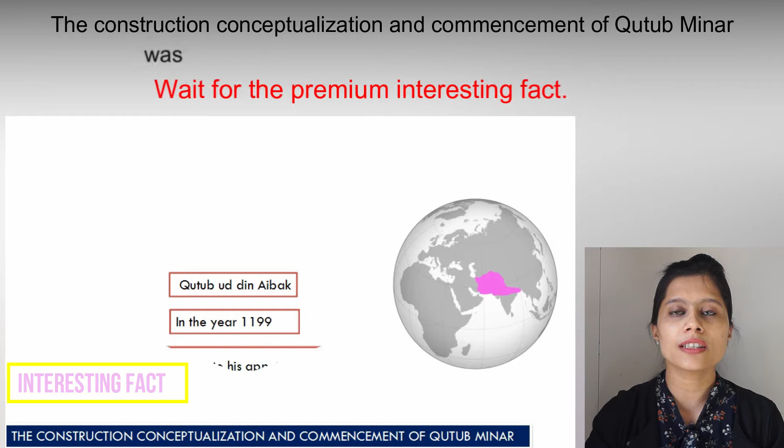The construction, conceptualization and commencement of Qutub Minar was started by Qutbuddin Aibak in the year 1199, perhaps to celebrate his appointment as the governor.

Qutbuddin Aibak was the founder of the slave dynasty and was a general responsible for northern India in the Ghurid dynasty under Muhammad Ghuri, and he was one of the first who brought the idea of the Islamic minaret to India.

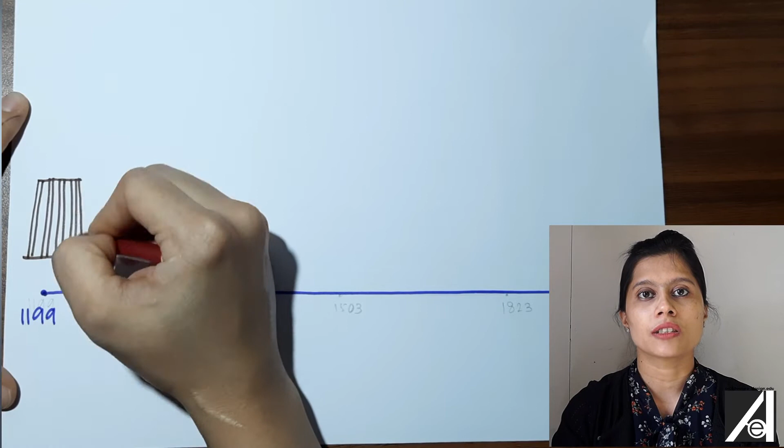Qutub Minar was not constructed under the patronage of one ruler but many. It was commissioned and started by Qutbuddin Aibak in 1199, but during his lifetime only one story was completed. Then Iltutmish added 3 more stories to the Qutub Minar and topped it with a cupola.

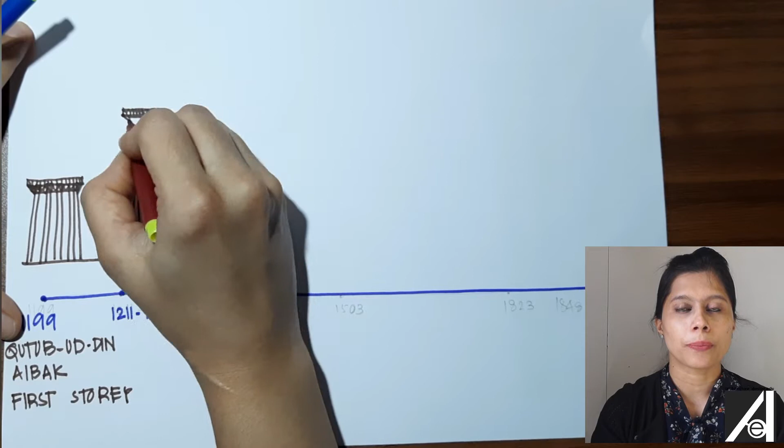After that, there were damages due to lightning which struck in the year 1303. At that time, the uppermost story and the cupola were severely damaged.

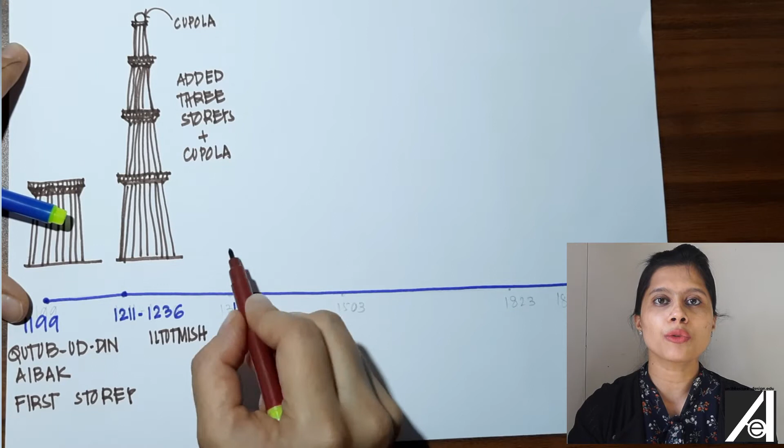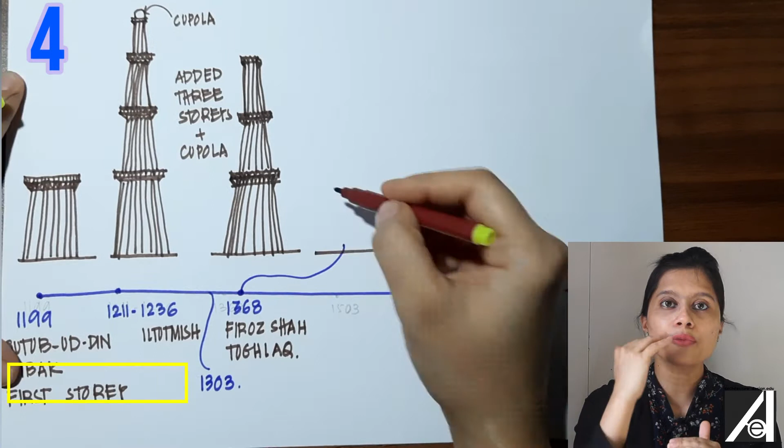In 1368, Firoz Shah Tughlaq added the current stories you can see. The 4th and 5th floors were added by Firoz Shah Tughlaq during the post-lightning strike repairs.

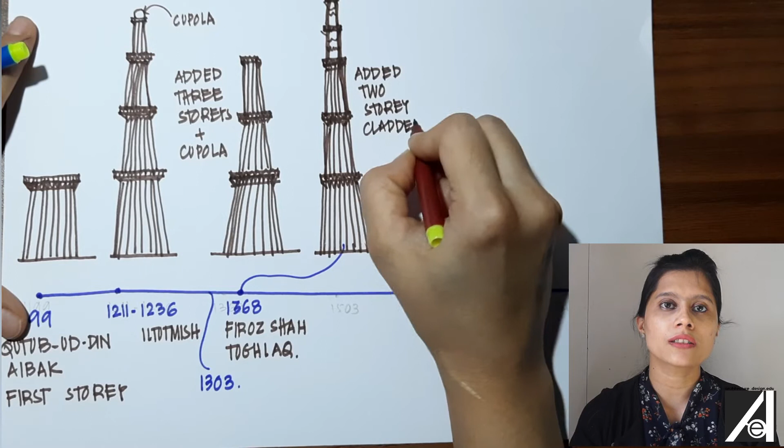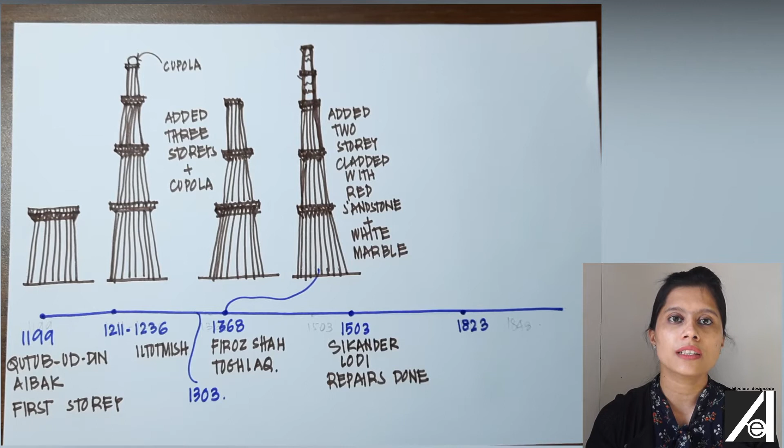After that, Sikander Lodi also did some repairs to the minar. In 1823, during the British colonial period, the cupola was replaced with a Bengal style chhatri on it.

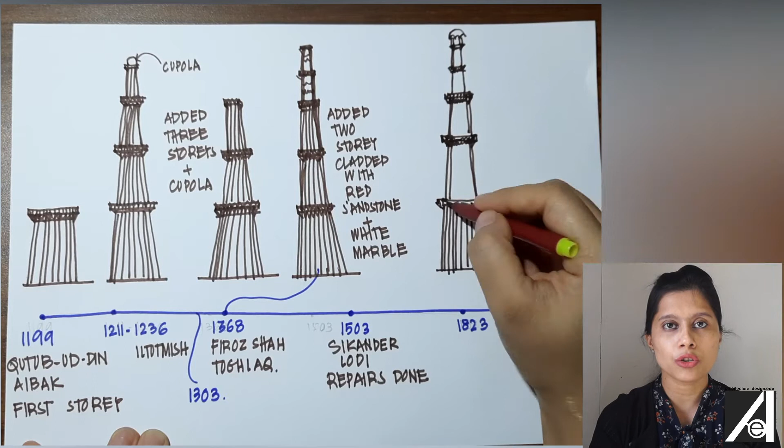After some years, the Britishers did not feel that it suited the minar, so they took off the chhatri, and now we don't find a chhatri on the Qutub Minar. It is just the 5 stories and the balconies.

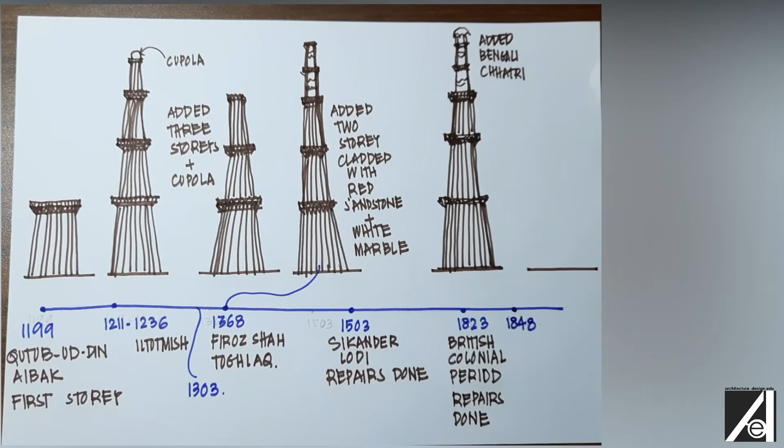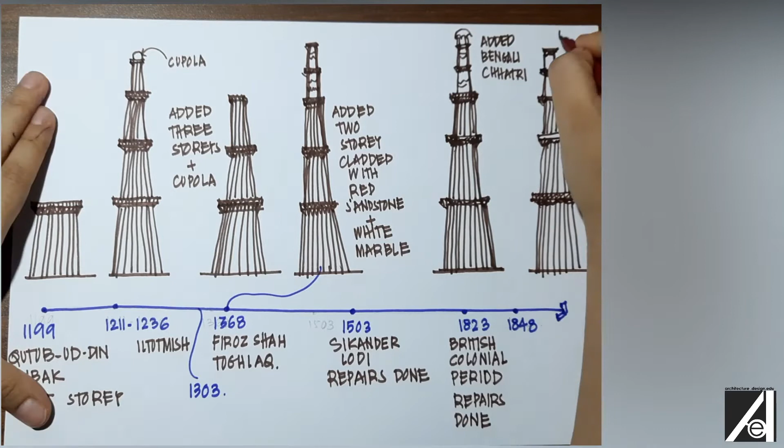Then what might be the inspiration of the minaret? It is said the Minaret of Jam in Afghanistan, which belongs to the Ghurid dynasty, was the inspiration — Qutbuddin Aibak also came from that place, so he brought the architectural inspiration from there to India. The Minaret of Jam is considered the main inspiration, built around 1190, a little before the construction of Qutub Minar started.

Similarities include that both are tapering towers. They both consist of cladding with Islamic calligraphy on it. The Minaret of Jam is made out of brick, while the Qutub Minar is made with rubble masonry. The Minaret of Jam is 65 meters in height, while Qutub Minar is 72.5 meters in height.

The next inspiration is said to be a minaret at Sistan, again in Afghanistan. It has a plan form just similar to the plan form of the stories of the Qutub Minar.

The objectives of construction of Qutub Minar were religious and secular. Religious because it acted as an adjunct to the Qutb Mosque located beside it, and secular because it acted as a victory tower to commemorate victory.

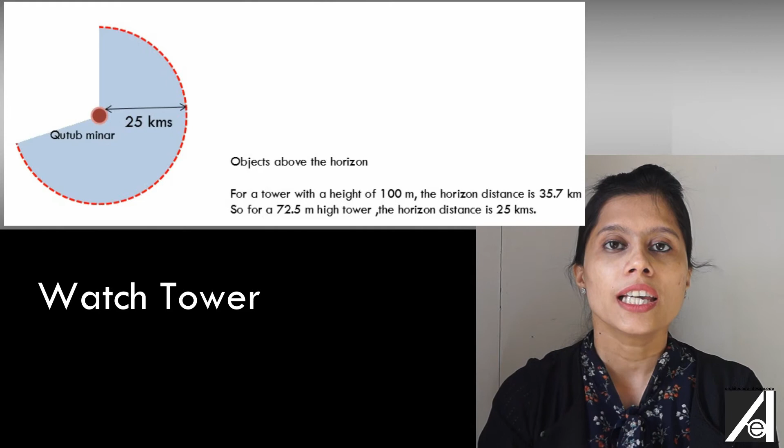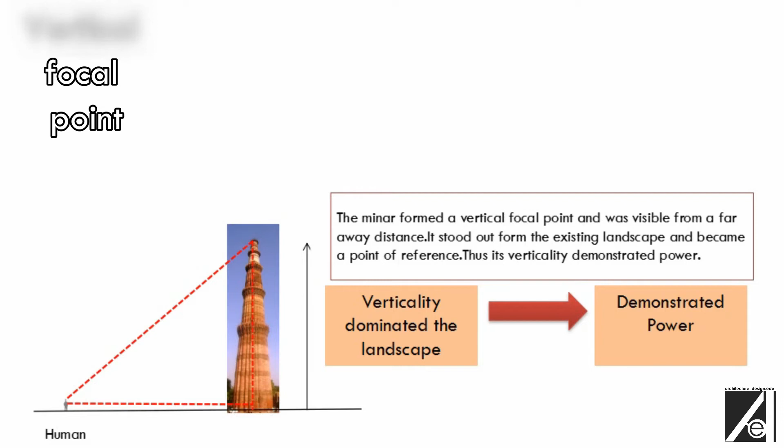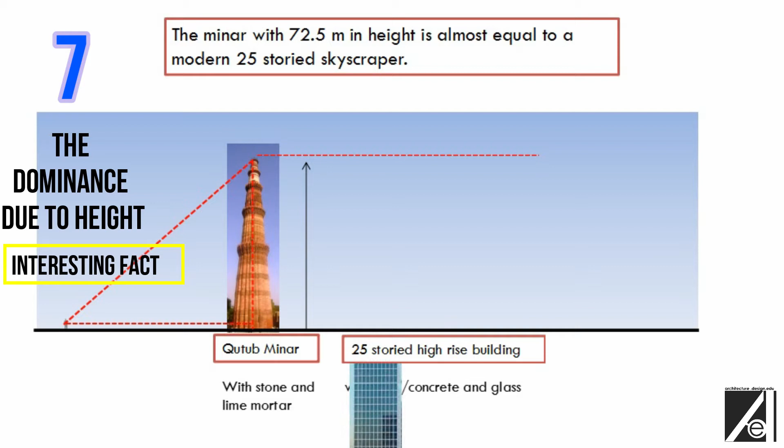For security also, it formed a watchtower, and this reason is valid because one can see almost 25 kilometers far away in all directions through the balconies of the Qutub Minar. The Minar formed a vertical focal point visible from far away, almost 4.5 to 5 kilometers distance. One could see the Qutub Minar stand out from the existing landscape and become a point of reference. Thus verticality demonstrated power. The height of Qutub Minar is 72.5 meters, which is equal to a 25-storied skyscraper.

What gives the strength and stability to the Minar? The Minar has a broad base and a narrow apex. The base diameter is 14.2 and the apex diameter is 3.1. As it was a Minar, it called for a large intensity of load onto the foundations, but the Minar is standing on well-conditioned soil strata with good soil bearing.

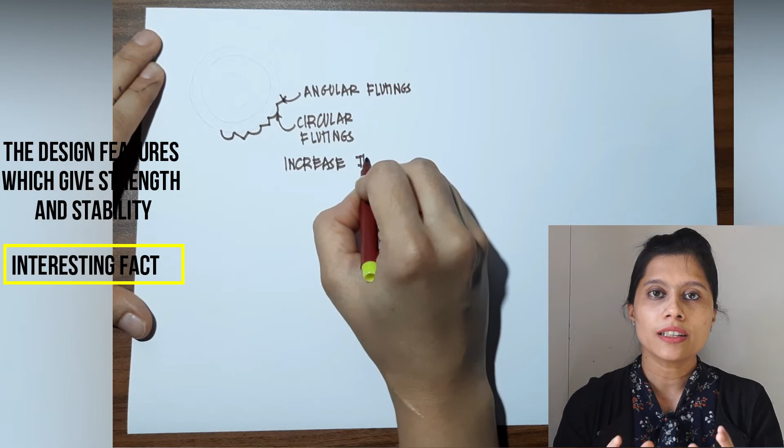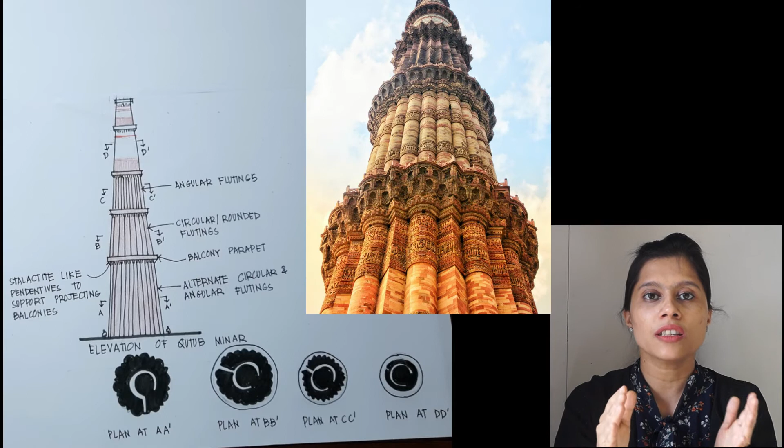To make it very stable at the base, one can find that the Minar is not only having a circular profile, but it also has flutings into the profile. The three bottommost stories of the Minar have flutings which add to the strength. The lowermost story, the first story, consists of alternate angular and circular flutings. The second story consists only of rounded flutings. The third story consists of angular flutings, and the upper fourth and fifth story don't have flutings and have a circular plan.

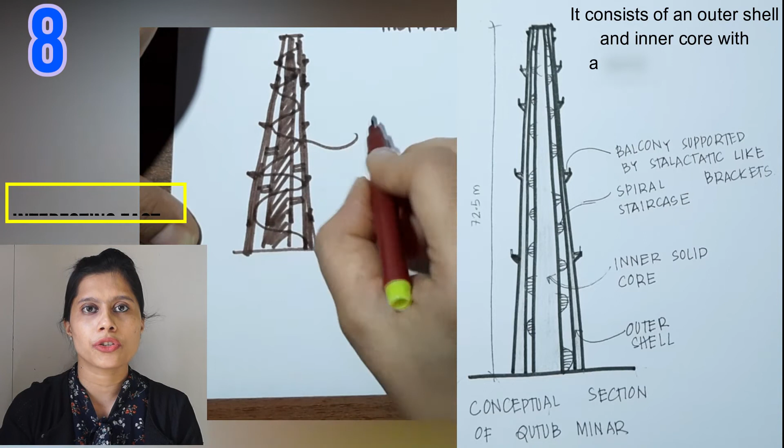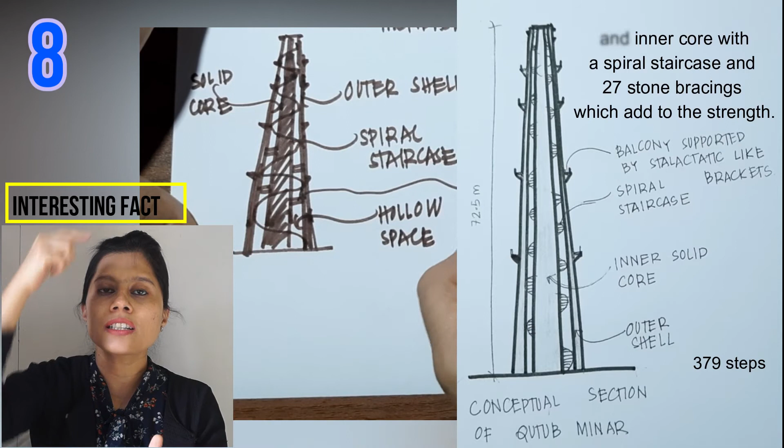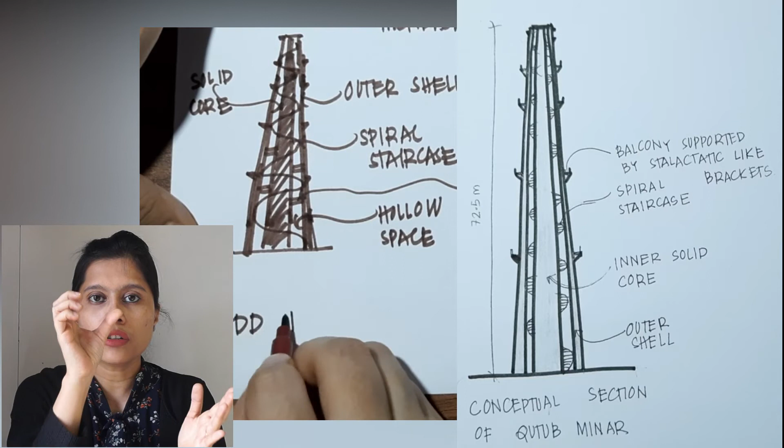Let's see the structure of the Qutub Minar through the section. In the section we can see there is an outer shell, and then an inner core which is very solid. In between the outer shell and the inner core there is a spiral staircase going through, and this spiral staircase has 379 steps. This spiral staircase adds to the strength of the Minar. It connects the hollow shell and the solid core, and it has 27 stone bracings which add to its strength.

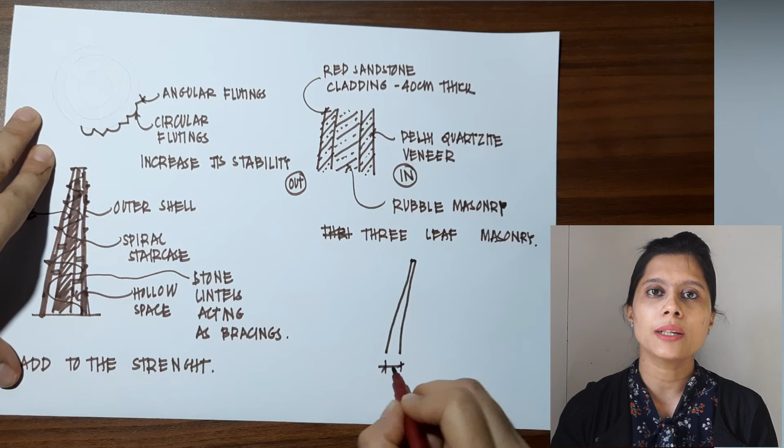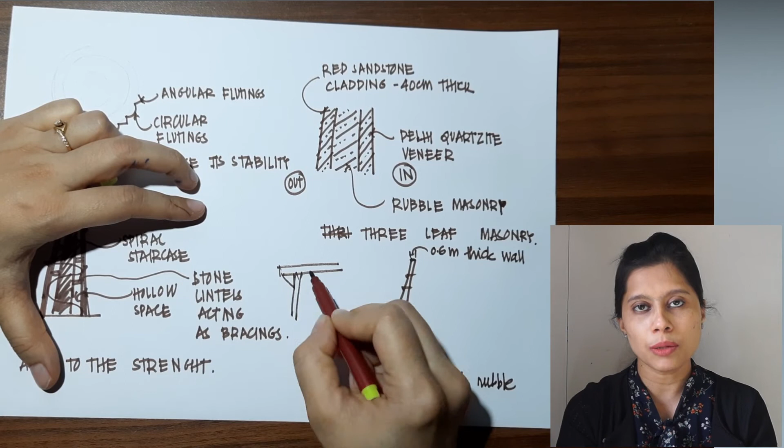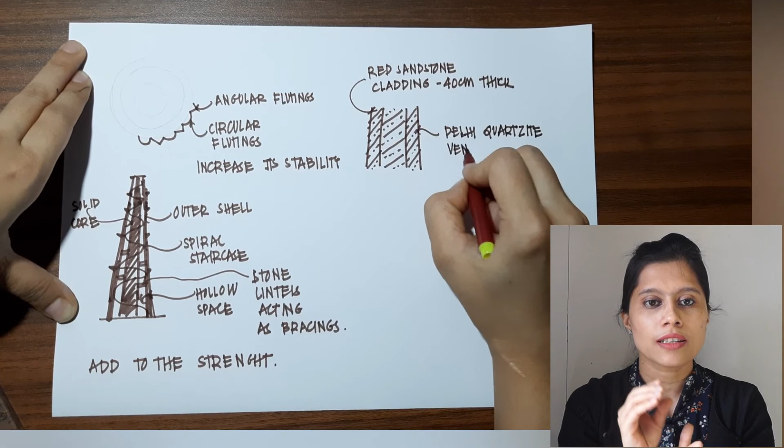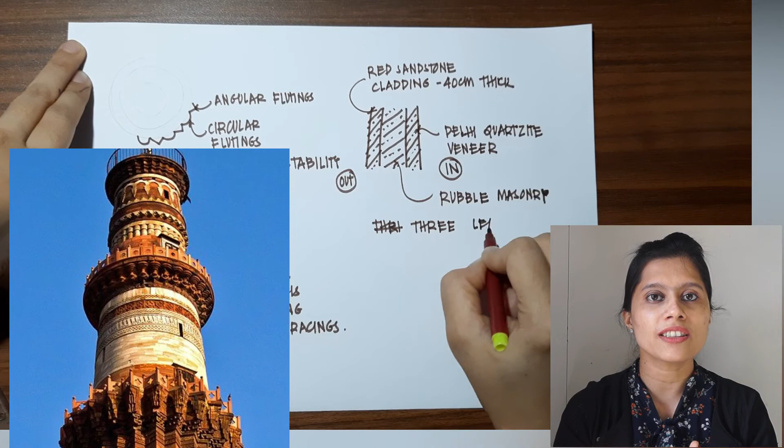What are the building materials and construction techniques? The Minar has an outer shell with 3-leaf masonry, with wall thickness at the bottom being 3 meters, tapering to the top at 0.6 meters, and this wall is made with lime mortar. The first 3 stories have red and buff colored sandstone as the cladding material, 40 centimeters thick, the middle layer is formed by rubble masonry, and the innermost layer consists of Delhi quartzite stone as cladding. The fourth and fifth floors are clad externally with a combination of red sandstone and white marble, and the internal veneer is of red sandstone. These layers are intermittently held together by iron dowels.

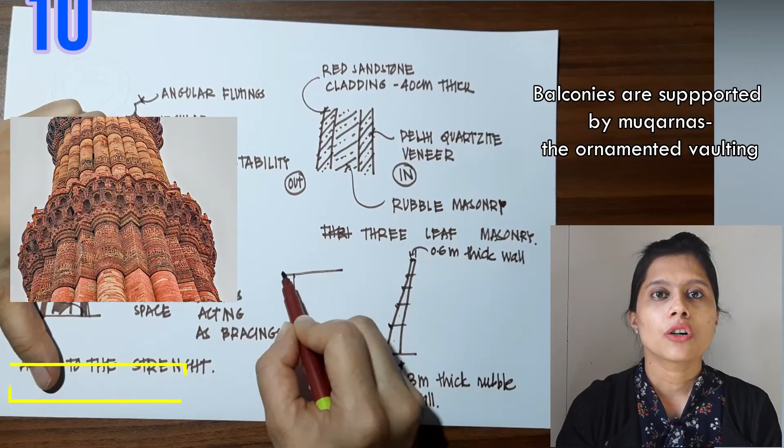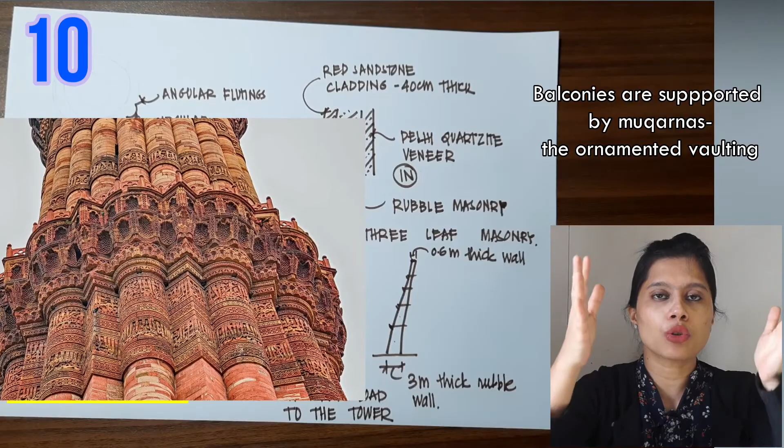We can also find that the balconies are supported by muqarnas, a different decorative kind of vaulting, which transfers the load of the balconies to the tower. You can see this in detail in the sketch.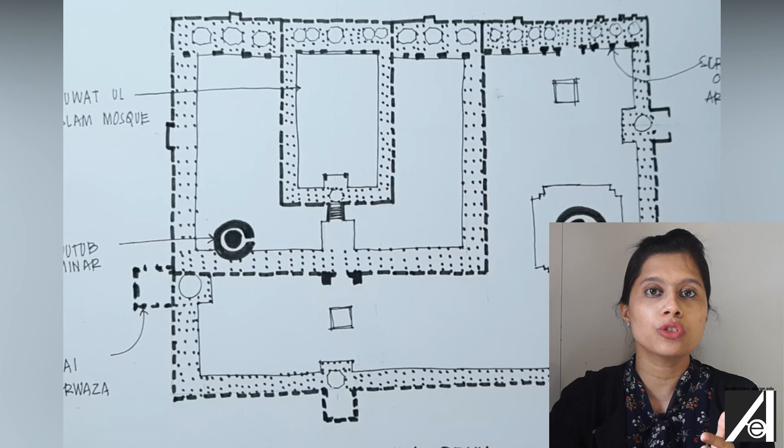When the first phase of the Quwat ul Islam Mosque started, it had only the courtyard, the cloisters, and the prayer hall, and after that the Qutub Minar was placed just adjacent to this mosque. After Iltutmish added another colonnade to the Quwat ul Islam Mosque, the size of the mosque increased by 3 times, and the Qutub Minar came into the cloisters. Then Alauddin Khilji added another colonnade, increasing the size of the mosque by 6 times. Alauddin Khilji also started the Alai Minar in line with the Qutub Minar, imagined to be almost 2 times the height of the Qutub Minar, but it was never completed.

So this is all about Qutub Minar. Please tell me which facts were new for you.